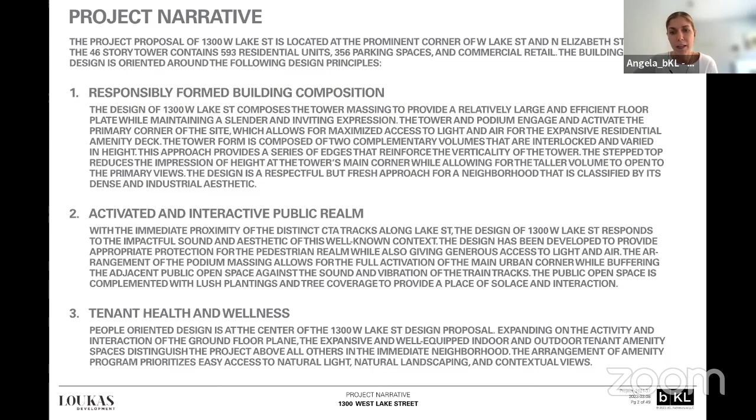So the design we're going to take you through today, and I'll explain further on the design, but we really worked a lot with the city on this design, and we have reflected a lot of the comments that we've received. We really wanted to think about the building composition; activation and interaction with the public realm was a big focus of our design, and then tenant health and wellness and really getting outdoor space and that interaction between indoor and outdoor into the design as well.

As we know, sustainability is a big focus of design today and is something we have to think of from step one. So we have been thinking about sustainability. We are aiming to achieve Green Globes level 2 certification. We're looking to limit the percentage of vision glass and to reduce heat loss and summer solar gain. Bird-friendly design, a lot of bike-friendly focus, electrical vehicle charging stations, and automated building systems for efficient controls.

And then again, with the site design, we are looking to really incorporate a lot of green space and landscaping, as well as shade, and thinking about where sun is on the podium, as well as the pedestrian public realm.

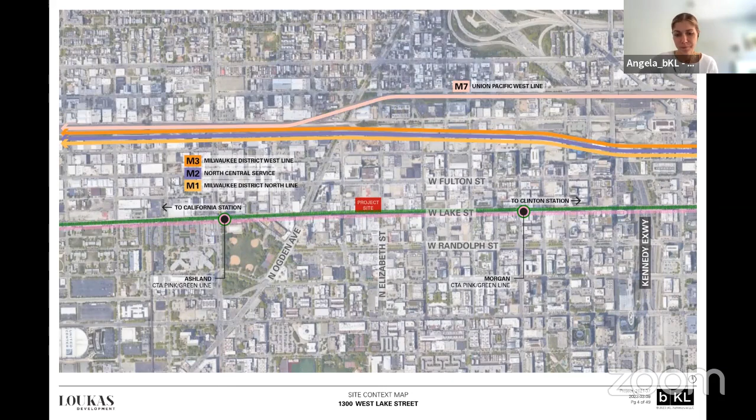So just situating everyone to the site, again, 1300 Lake, it's at the corner of Lake and Elizabeth. You can see here that we are in between two Pink and Green Line stations, the Ashland and the Morgan station, and then as well as just south of our Metra lines, and then west of the highway. Currently zoned M2-3, upzoning to a DX-7, as Josh had indicated. And we do qualify as a TSL.

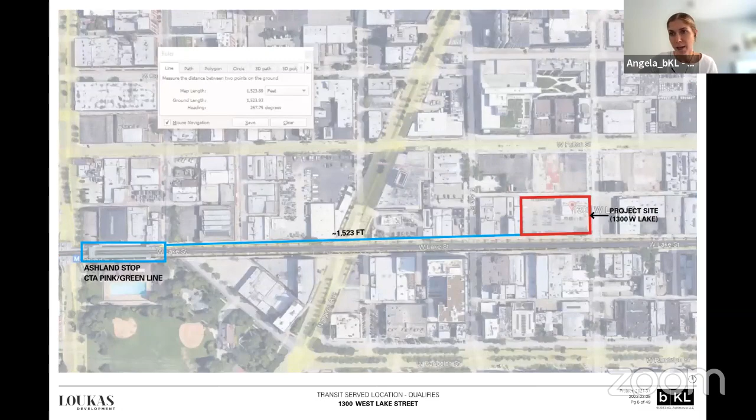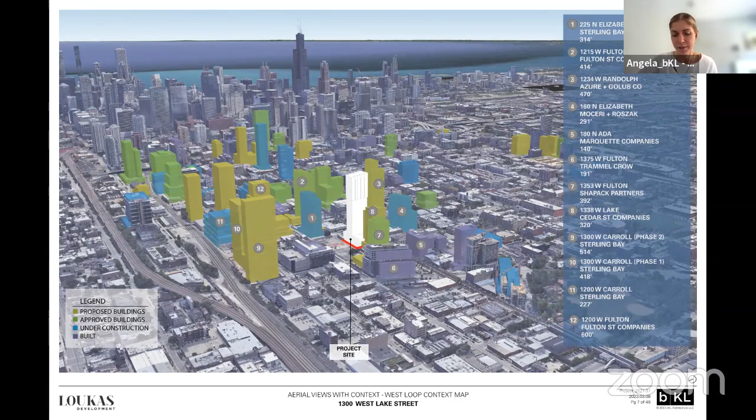Zooming in a little bit to understand the adjacent development, most important, we have to the west, 1338 West Lake. We definitely looked at this in considering design, but we also looked at 225 Elizabeth, as well as 1353 West Fulton, in terms of where they're adding open space to make sure that we're continuing what's happening and responding to what's being proposed in the neighborhood.

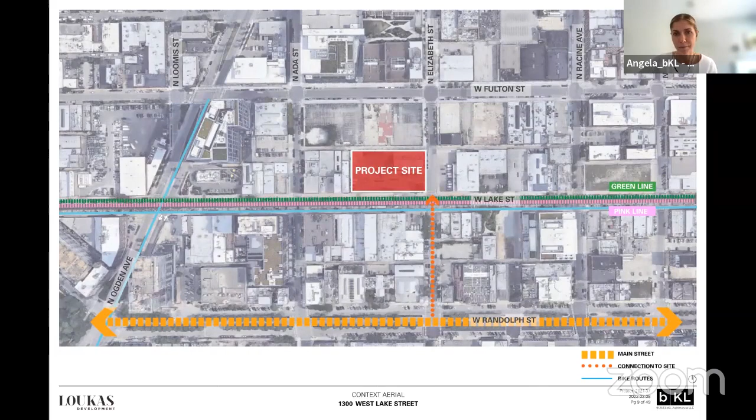Some of the existing site conditions, I think everyone knows Peoria Meats, and that's what's currently there. So that's what the site kind of is known for. There are some current existing curb cuts that I'm going to talk about along Lake and along Elizabeth, as well as our adjacency to the Lake L.

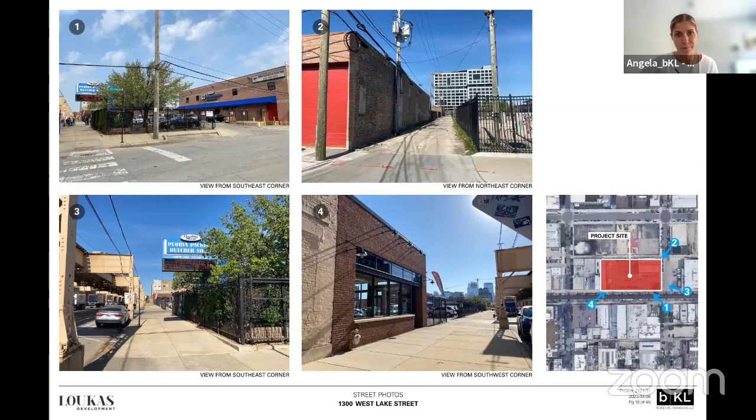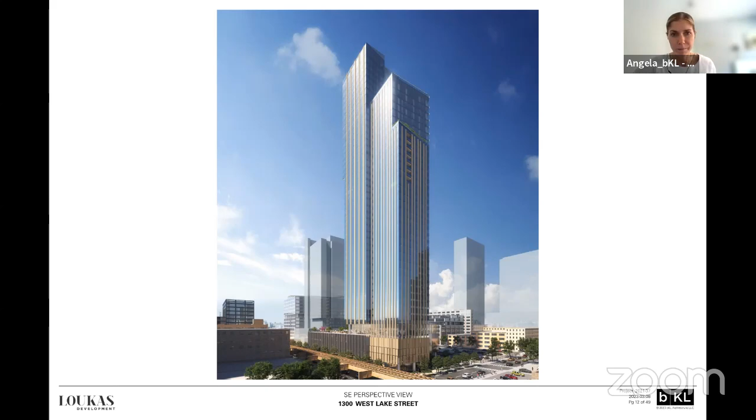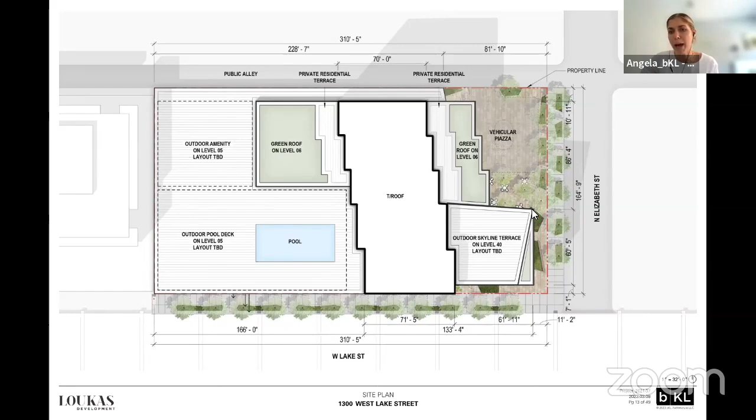Jumping back really quick, I forgot to mention that we did position our tower as far east as possible in response to the Cedar Street proposal to our west. So thinking about that tower separation and making sure that we're responding to some of the other towers that are proposed in the neighborhood. We wanted to hold the corner with our tower, but we did pull back to help open up that public realm, that ground.

So this is just a diagram showing some of that street activation. Again, that thoroughfare from Randolph along Elizabeth, really activating that podium with retail frontage all the way lining Lake as well. Again, not turning our backs to Lake. And then having the active use of our residential lobby off of Elizabeth and really activating this as an urban plaza.

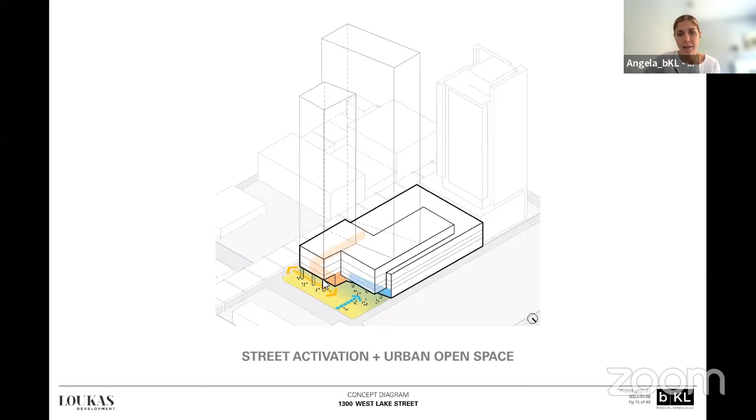The massing and composition that we chose was kind of pushing and pulling at the two volumes. Instead of having the volumes oriented at 90 degrees, which is pretty standard, we actually decided to splay them open a bit. This is also thinking about designing the building from inside out and making sure that those inner corners get more views to the city and aren't looking directly into each other. It also really gives a really interesting juxtaposition against the very stark grid of the West Loop.

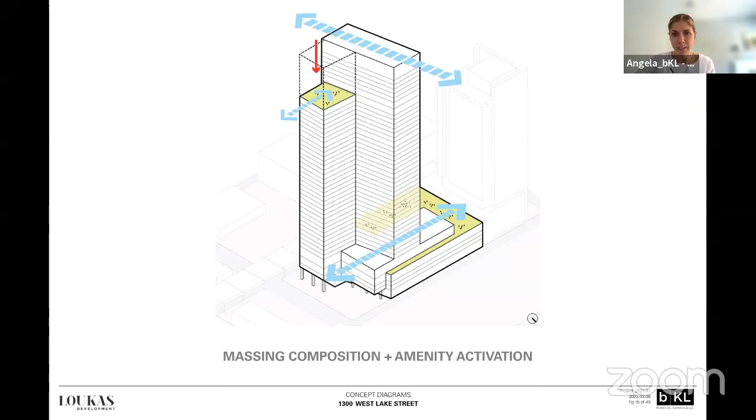We looked at adding some textural expression to the top of the tower. We started with this just at the top of the tower, and in response to some of our sessions with DPD, we have now shown it on both the east and west. And we have also brought this expression now down towards the podium so that it's not only noticeable and unique from far away, but that's also something that the pedestrian public realm will interact with, so that it's tying it together to make a cohesive design.

These are some of the West Loop design guidelines that we responded to. Obviously, we really take those into consideration when we're designing, thinking about the scale of the podium, keeping that low, activating the retail, which I talked about. Number 4 is holding that corner, although we did pull in to really allow space for that public realm to exist. We looked a lot at stepping back the tower at the top and creating a very unique design condition at the top as well.

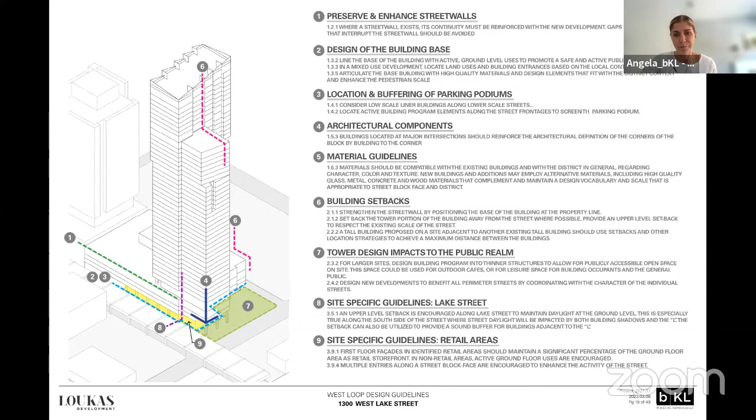I'm now going to hand it over to Matt. He's going to talk about the landscape and public realm, and then I'll take back over and talk about the exterior facade materials when he's finished.

Great. Thanks, Angela. So here we have an overall site plan that includes the streetscape frontage along Lake and Elizabeth, as well as the shared piazza space to the northeast and a dog run located along the alley. Lake Street, of course, has the overhead L tracks that Angela mentioned and creates a lot of noise and shade. And so the design for the site is really intended to mitigate that by providing a dynamic and verdant streetscape experience both along Lake and Elizabeth. And really kind of locating the primary pedestrian area in the northeast corner, kind of separated by the architectural volume to make that a bit more pleasant of an experience to hang out.

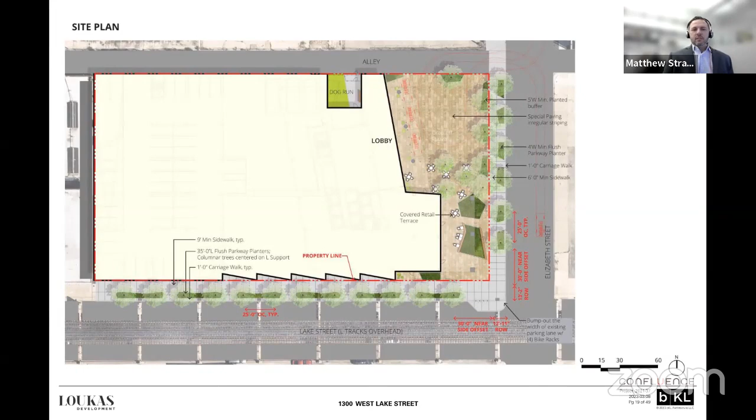Next slide. So zooming in a bit here, you'll see that the landscape begins to pick up on the angular parti of the architecture and really breaks it down to more of a pedestrian scale. A few key zones here: the piazza to the north, what we're calling the oasis in the center, and covered retail seating space to the south.

The streetscape along both Lake and Elizabeth use the typical 25 feet on center tree spacing required by the landscape ordinance, but they use this angular parkway planting motif that ebbs and flows a bit to create a more dynamic experience. It's also what our firm is working on in the Cedar Street proposal next door, which is doing something similar to carry that continuity through.

And then along Elizabeth, a staggered row of tree planters is used to edge the piazza space to create a bit of an alley to walk through instead of just trees to walk by. The piazza space is designed as a shared vehicular and pedestrian space that's flexible enough to accommodate drop-off day to day, but can easily be closed off to host things like farmers markets and small community events on the weekends.

The Oasis is a terrace space that overlooks that piazza, and it features trees that emerge out of the paving with movable planters and seating below. And then the retail seating area is a covered space that combines integral benches and movable tables to create something that really looks sculptural and inviting, whether busy or not. Next slide.

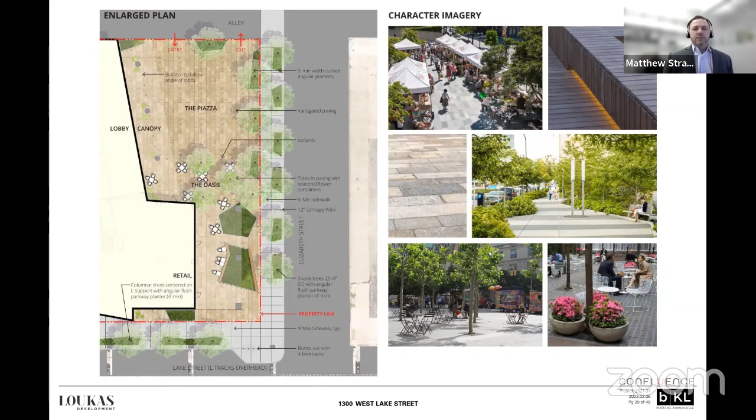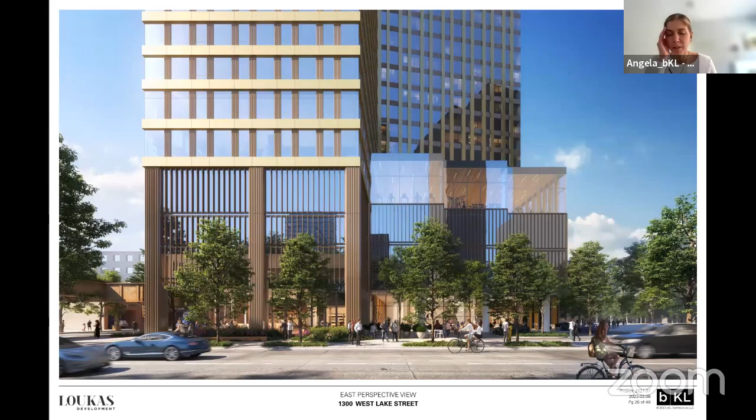So continuing on to the pedestrian realm and looking at that landscape space alongside the architecture, the first of our two options is this first alternate. We looked at bringing some vertical element, bringing the tower down to the ground and using some screening elements over the garage area, as you're seeing here with some spandrel glass, and then highlighting that active amenity space on the third level and the active lobby space on ground, letting it be a quieter expression where the parking is.

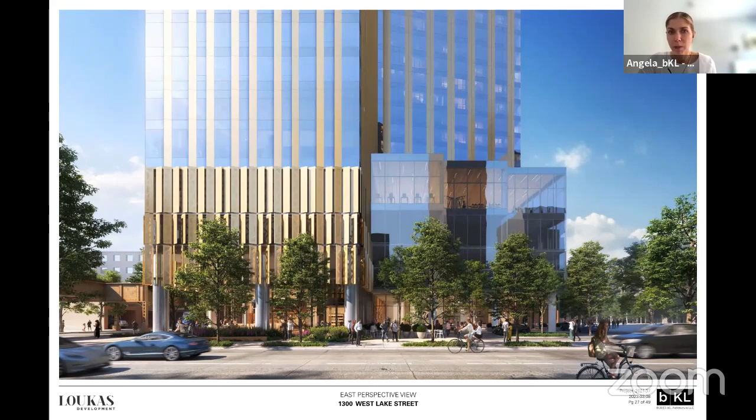In alternate two, we are seeing more of a vertical expression in the tower. We're looking at integrating some paneling in a more artistic design and letting that take on the form of some of the serration that you're seeing in larger moves around the building.

Looking at the massing and seeing where we're applying different materials, in this first alternate we have a horizontal metal panel expression on the east volume, and a more vertical metal panel expression on the west. Where these are either carved back or articulated at the top, it goes to a more glassy expression. We are still using spandrel glass to reduce the amount of vision, but a simpler, cleaner expression where the form starts to take on the articulation within itself. The podium is looking at using metal and brick.

This is in response to our proximity to the L. We did want to look at sound absorptive materials, and we know that a masonry expression is going to help with that and not just reflect all the sound. So we are thinking about that in the podium. We also looked at bird-friendly material in terms of fritted glass or less reflective glass, not only at the podium, because we are sheltered by the L there, but also at our amenity terraces and where there might be some landscaping that's incorporated there as well.

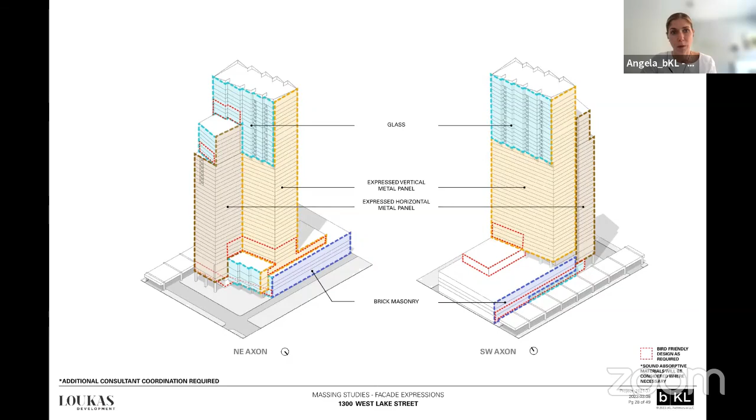In elevation, you can see this alternate one. Again, here you could really see the expression of the horizontal and the vertical. The other thing that we looked at with DPD is the expression at the top of the tower. We are looking at using a screen around the mechanical to really emphasize the serration that is in the design, so that when you're looking up from the tower, that really is emphasized with that screen. Again, you're seeing the quieter glassier expression where the form takes on more movement itself. And then the more textured horizontal and vertical expression in the tower, transitioning to the masonry podium.

Zooming into that podium, you're seeing that there is the masonry piers that are inset with the metal panel on the horizontal. And then in relationship to the L, you can see that we really thought about getting over the L with any of our active uses. So we did build that up in the parking podium, and then to get that amenity activity above the L, and then also activating the ground floor or below, leaving that as a very glassy expression.

Zooming in on each of the expressions, in this alternate one, we're looking at kind of a projecting horizontal or vertical metal panel depending on which volume you're looking at. Either the horizontal is projecting on the east volume or the vertical is projecting on the west volume. We're looking at a textured metal panel in the opposite orientation with vision glass, and then also the sections where the massing takes on more texture to let that be quieter with vision and spandrel glass.

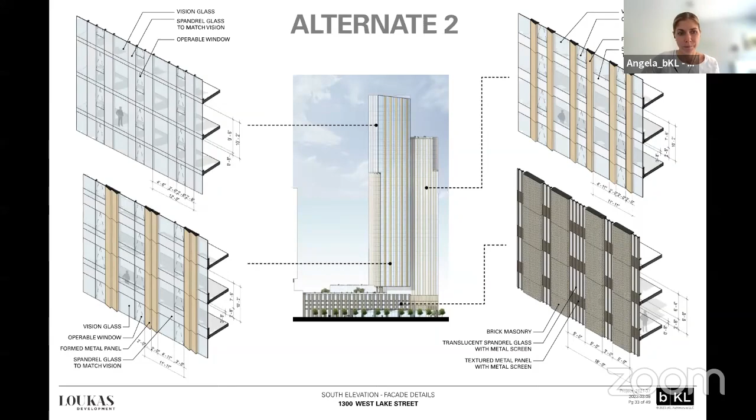Zooming into the alternate 2 podium, what we're looking at here again is a more artistic kind of expressed metal panel that's formed and is looking at that serration that's happening along the retail at the top of the tower. And then it's a quieter expression on the volume that's coming over to introduce and to accent the residential entrance. We are looking at using signage on this middle tier as well to really emphasize where the residential entrance is.

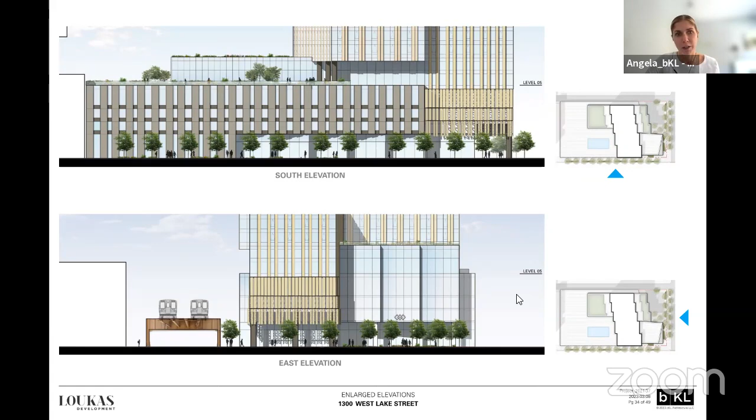This is just some facade precedents. What we wanted to show here is that we're looking at the textured full glazing portions where we're using a combination of spandrel and vision. And we also have our Cirrus Tower as well. And then another, the Avery by OMA, as some of our facade precedents. You're seeing the metal panel precedents at the bottom of the page. And what we're looking at here is a metal panel tone. Not the actual metal, but something that is beckoning back to this kind of softer bronze coloring that you're seeing in the lower images.

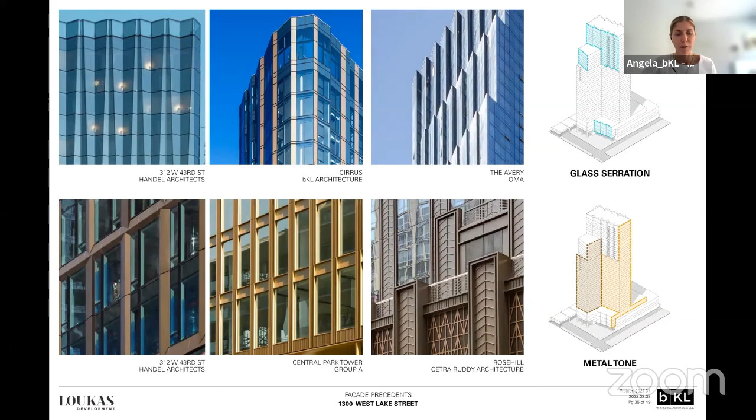We also integrated balconies at the top when we worked with DPD and carving back that tower. So that's kind of happening at what we're calling this uppermost tier.

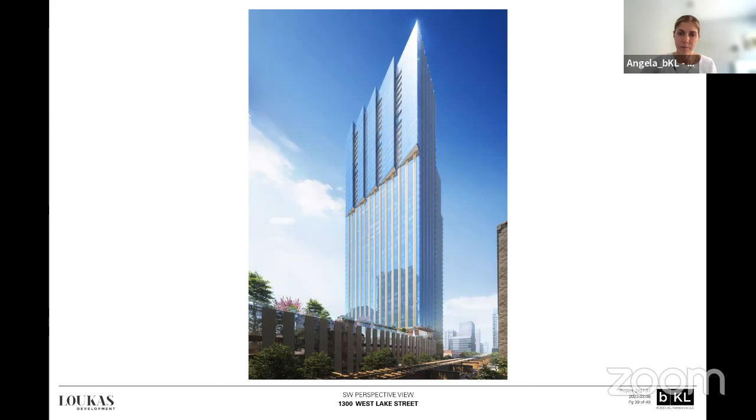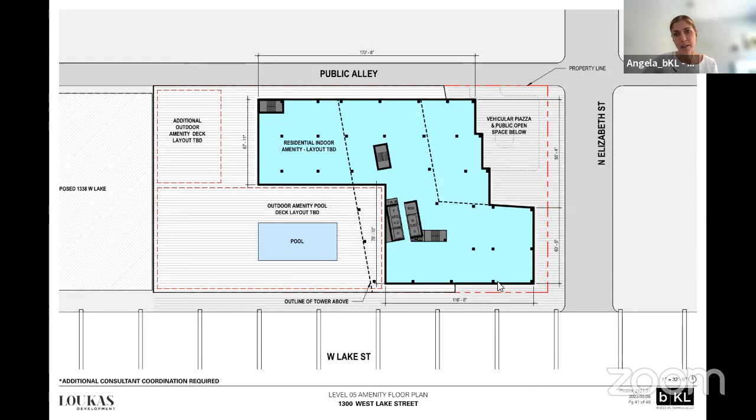And then the upper tier, introducing more residential amenity at the top. And then the uppermost tier, it goes to full residential levels.

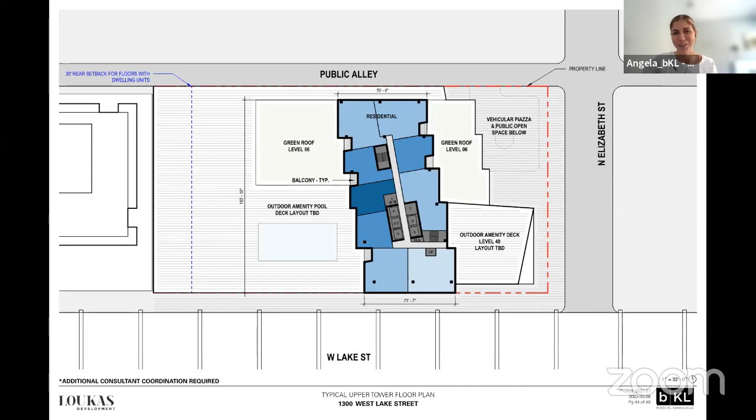And then here's just a program section. So you're seeing kind of everything we talked through, the residential and retail at the podium, parking, upper level amenity, lower level amenity on level 6, and then the upper level also at level 40, where we introduce the tower setback, and then residential happening in between.

And then, yes, lots of sun studies to understand where we should most place our podium, thinking about separation from the tower to the west, as I already spoke about, and kind of just studying those as well.

So now we can move on to questions.

So I'll try to project as much as I can. Before I ask a question, Angela, can you take a moment to talk about proximity to mass transit and what TSL bonuses, if any, were leveraged in the proposal?

Sure, let me just go back. So in terms of TSL bonuses, we did look at, we are making a parking reduction versus what's required in the DX7. We are not taking that full reduction due to the fact that we think that we're serving the community and what's needed with this 593 units in addition to the retail. But mainly we are taking that reduced parking ratio down from what's required in DX7, from 0.7 to about 0.53. In terms of other bonuses related to TSL, Katie, I don't know if we're taking anything else other than just that reduced parking.

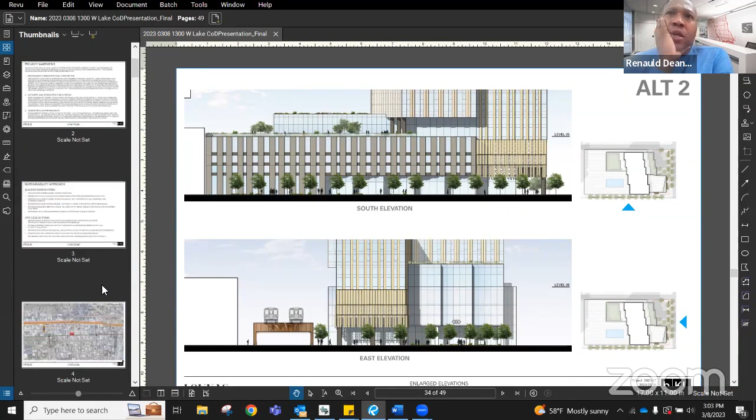Okay, no, thank you. So a couple of thoughts, I don't know if I'll call them questions, more so thoughts. So with respect to the vehicular piazza, I guess in kind of listening to your oratory, you made mention of a desire to obviously pull cars into the site in a safe way.

And it seems to me, Matthew, turning to you, that aspiration may be at odds with this notion of this multi-use combo pedestrian-vehicular piazza that can flex and open and close, just given the amount of vehicular volume that Angela made reference to. I guess I question whether or not in reality you'll achieve the aspirational desire that's been articulated for that space.

I guess the other thing, in looking very briefly at the sun study, the renderings kind of imply a quality of sunlit and daylit space that I wonder whether or not you're going to actually achieve, not just with the shadow that may be cast by your own structure, but just in the volume of development and the verticality of the development in the surrounding and neighboring Fulton Market districts. So if the two of you want to kind of talk about that and respond to that, I appreciate it.

Sure, yeah, I think that's a valid concern, and it's something we've been discussing with DPD as well. I think their concern, as well as ours, was not making a space that really feels like a vehicular drop-off, where it's really intended only for cars with a clearly articulated vehicle route. We wanted it to feel like a space that both pedestrians and vehicles could occupy, even if it could simultaneously be roped off for an event. We really wanted to take away the idea that it looks like a cul-de-sac in the middle of the space, and really feel like a more open pedestrian experience.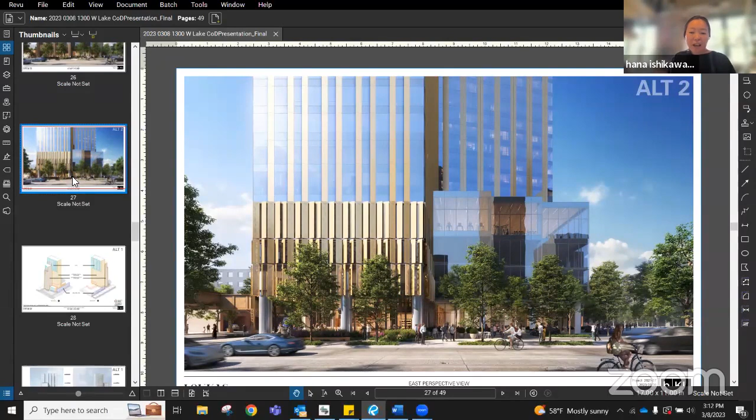I'm also a little worried about the safety of the driveway right next to the sidewalk. If you had a small child walking by themselves, the plants are honestly taller than them at this point, and they're walking into the piazza which has no curb. I agree that having that porosity when there are no cars is interesting and important, but I think there's a little bit of danger in having these openings and treating it like a true plaza, because it really is car centric.

And I think your planters and everything are kind of in the way of that. Also, we have 593 units - I bet half of those units are going to have dogs. So you have 200-plus dogs every day through this site, coming in and out multiple times a day.

I also think you need to protect your planters and think about where the dogs are going when they first leave the building, where they're relieving themselves, and make sure all these planters are protected, because some planters go right down to the ground, and we all know the survivability of those plants is next to nil if that's the case.

Thank you. Yeah, thank you - I think that's all great feedback. I agree, we could probably strengthen more of the portal connection from that corner straight into the piazza space, and think about that a bit further. So we'll certainly study that.

In terms of the porosity, we've been playing a little bit with the limits of the landscape ordinance, because ordinarily as a vehicular space, that piazza would need a 7-foot wide landscape buffer and a fence completely cutting it off from the sidewalk. This was an ongoing discussion with DPD, but their desire was to say, let's maybe go away from that and make it feel a bit more porous and not cut off from the life of the street. So while we can certainly study that further, that's where it was coming from - but we appreciate the comments.

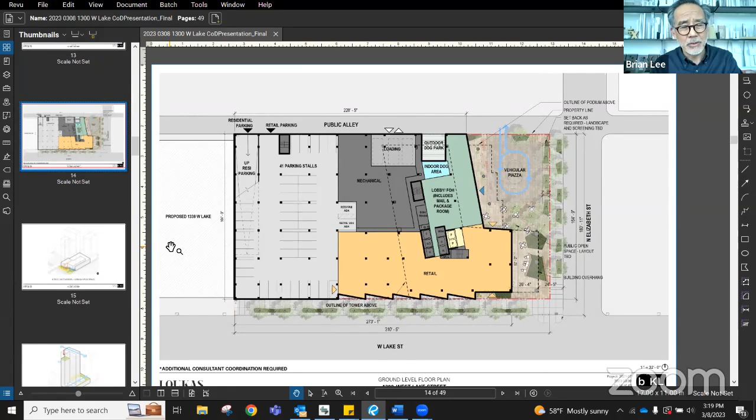open space, art, landscape? I just kind of don't quite understand the story behind the project, because to me, the story behind the project should be expressed in how you develop the building. And I know we can talk about the piazza, and I think actually you could probably, with proper programming, turn it into a court. Let it be a court, and when it's raining and snowing, and other times you could keep people out and develop great programming there.

You could probably stretch retail along the parking garage, and even probably reduce parking. Those are all reasonable things to ask of yourselves. Would people really be driving that many cars? I know you're trying to protect yourself, but it does affect the quality of that human scale environment at the ground.

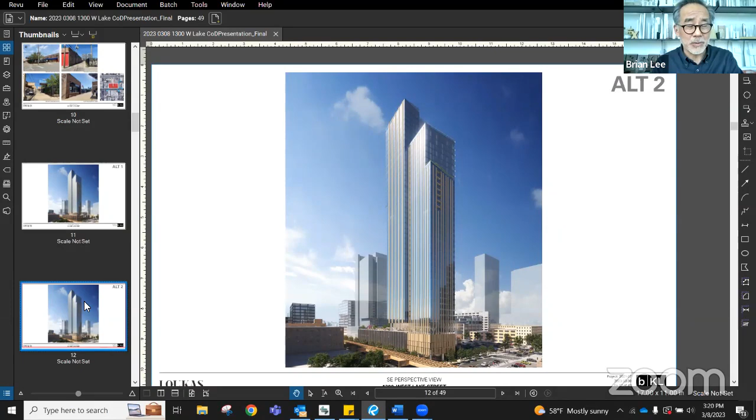I think the biggest question, though, was for the tower, because to me, the tower massing was kind of okay. You broke it down. There's a bend in it. It dropped down in scale so that as you approach it, moving east to west, or see it from downtown or from the western areas, it seems to have some articulation and scale. Although I guess you probably are imagining that the Cedar Street building would block the west, but the west is going to get pretty brutal sunshine, and so you have a broad facade there.

But I guess the bigger question is, besides the massing, is really, what does a tower represent, and its character and personality.

And right now, it just seems that, particularly in Scheme 1, it's just kind of a slightly uninspired collage of lots of different elements. And I think probably 2 seems to be a little bit better, but you should not think of the facade treatment as just being responses to DPD in terms of, well, let's change it from horizontal to vertical, let's push it in, or let's change the material here or the spacing there. It can't be just decoration.

Personally, I think you have to have an idea that, along with the development team, really says, what is this building about? Is it about balconies? Could you show it on some but not on others? And so is there an idea about being able to connect with outdoors and nature? There's obviously a very famous building here in Chicago that had a very standard plan, but an incredible expression of balconies that define the whole building.

Is it about opening up the spaces internal to your plan? Because right now you have an interior corridor that doesn't daylight and it's tucked into the core, so there's no sense of relief. It's pretty ordinary. Do you express the programs of either the units, the modules, or the circulation, or the common spaces? It's a pretty tall building, so do you express the structure in a way that says I am a tall building, it takes a lot of effort to hold me up, and I'm going to be proud of that and really soar?

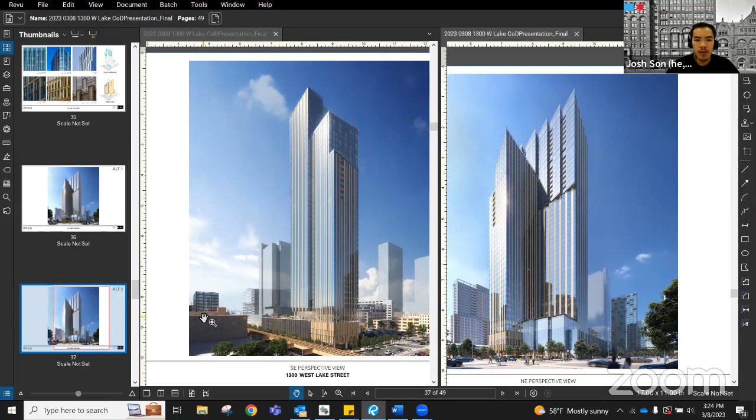All right. I believe that should be it. I know sometimes we have issues with our Zoom hands, but I believe that might be it. So, thank you, Team BKL. I think we will move on to the second item on the agenda. Thank you, everyone. Thank you for your time. Thanks. Bye.

If the next applicant team can go ahead and start sharing your screen, I'll go over the summary. The Ave, located at 3601 to 3625 West Chicago Avenue in the Humboldt Park community area in the 27th Ward, is a proposed mixed-use development on a 30,000 square foot site along West Chicago Avenue between North Central Park Avenue and North Monticello Avenue. I don't know how Chicago pronounces that word. The applicant is proposing to build by right within a B3-2 community shopping district. The project will be a 4-story, 49-foot tall mixed-use building with 49 affordable units, 7,700 square feet of commercial and community space, 32 parking spaces and a community plaza.

To any committee members who are associated with this project, if you have not yet, please recuse yourself at this time and for the duration of the review for this project. To the presenters, please clearly state your name and your relation to the project prior to speaking. You have 15 to 20 minutes to present your proposal. Committee members, please hold your comments and questions until after the presentation.

And then once the presentation is ready, preferably full screen if possible, please state your name prior to speaking. This is Brian Kidd from Gensler, and I'm getting this up to speed here. Thanks, Brian. Hi, my name is Bill Williams with KMW Communities. I think my partner, Julie DeGraff from POAH, is on the line. Got it. I don't see her. Maybe she had a conflict at the last minute. I can see, but it's a PDF. Yeah. You're not able to do full screen. I think that's okay. Brian, if you want, I can do it from my side, but you will have to prompt me when you would like me to move on. Yeah. My apologies, we're having some technical difficulties.

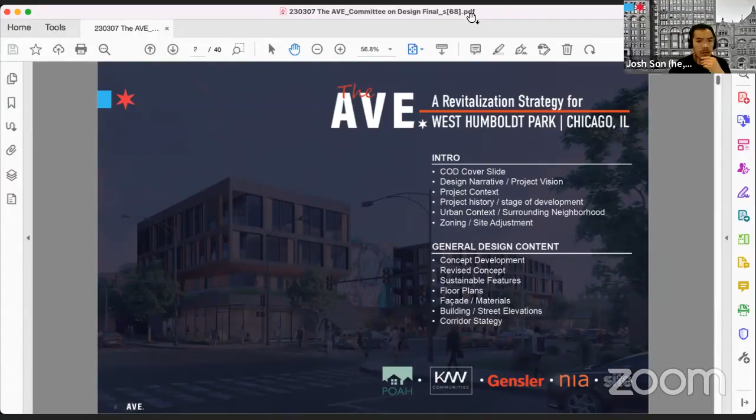Brian, you can click on the X on the page thumbnails, up top. Right in front of page thumbnails, there's an X. Okay. Yeah, right. Got it. Sorry, Brian, Control L should also put you into full screen mode if you'd like to try that too. Or if you're on a Mac, I think Command L. Is that full screen now? No. It is not, but I think we can go ahead. Let me just go here to my desktop and share that. Okay. Perfect. Great. Awesome. Sorry about that.

Thanks, Brian. I think I will lead off this presentation. As Josh mentioned, this project is located at 3601 West Chicago Avenue, commonly known as the Ave. Here's our agenda for the day. Before we get into it, I'd like to introduce our team. We have POAH as part of the development team, KMW, and the design team is Gensler, Nia, and Site. And we have DLA Piper as our land use attorney. I don't know if anyone on the team wants to make a formal introduction. If not, we can just move on.

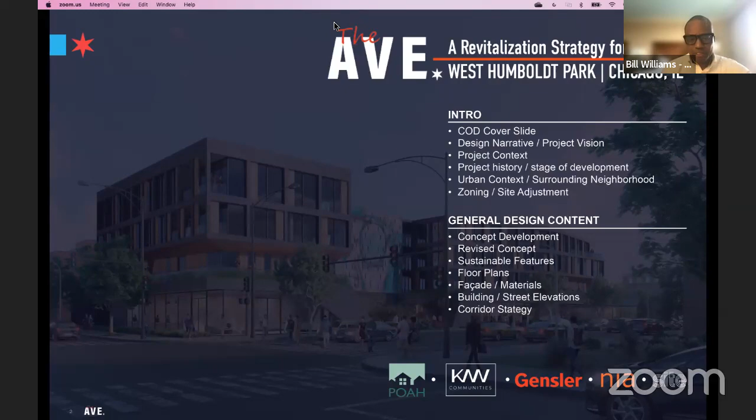You want to move to the next slide, Brian? Oh, technical difficulties. Julie, you were saying something? We're good, Bill, with your introduction. Thank you. I'm sorry. I'm trying to get to the next slide and it's not working here. Brian, let me take over. All right, you take over. Allow me to be the sharer, and then Brian, during the presentation, just prompt me to move to the next slide. Got it. My Mac is not working well with the Zoom. Okay, I think this is the next page. Here we go.

So I was mentioning that POAH and KMW are the primary developers on this project along with the community. And this project is one of the Invest South/West sites. The goal of this site was to bring investment, bring attention, and activate this side of West Humboldt Park, and also provide elevated affordable housing. The project consists of 70,000 square feet, and within that project, we'll have 49 affordable apartments and 7,800 square feet of retail.

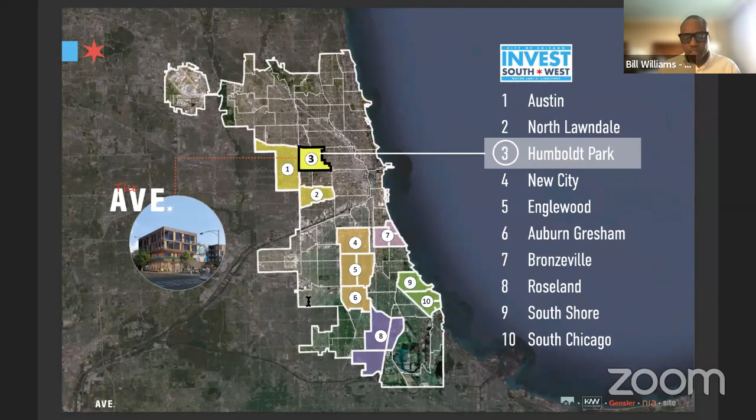And the project will be anchored by a longstanding neighborhood institution, Neighborhood Housing Services, that provides housing services and preservation for the neighborhood. And we're excited to get this project going because it's much needed in West Humboldt Park and will hopefully spur other developments and complement other efforts that we're doing in the neighborhood. So I'll turn it over to Brian now and the design team, and just prompt me when you go to the next slide.

Thanks, Bill. My name is Brian Kidd. I'm with Gensler in Chicago. The project is located in Humboldt Park. Go to the next slide. Located along West Chicago Avenue, 3600 West Chicago, right on the street there between Central Park Avenue and Monticello Avenue. A couple of the local developments or buildings: there's the Kelly Hall YMCA to the west, and the Rowe-Clark Math and Science Academy also to the west.

The site is currently zoned B3-2. We're looking at upzoning it to B3-3, mostly because of the number of units. We are looking at trying to do this project as not a PD and making it as-of-right zoning with an upzone to B3-3 just to allow the number of units. A B3-2 would allow us to do 48 units, but we're looking at doing 49 units, and that would require this slight upzone to accomplish that.

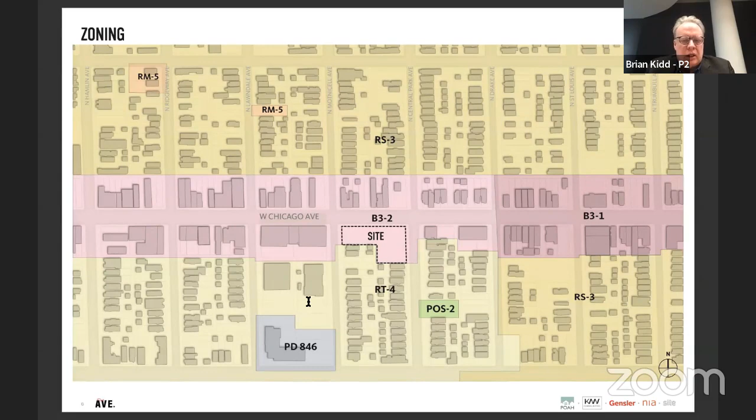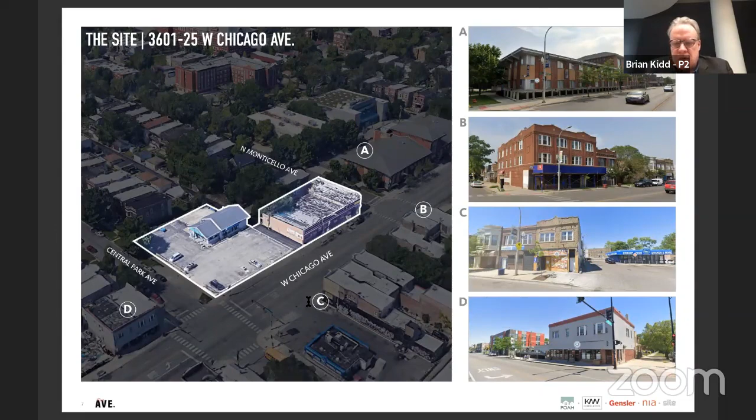The site, as Bill had mentioned before, is currently the NHS office, which is formerly, I believe, a gas station that was on the site. That is along Central Park Avenue. And then there is a city-owned building directly to the west. The little diagram there that is the school. B is some existing buildings that front along Chicago Avenue. It's a combination of 2- and 3-story buildings along that, and then directly across Central Park again are some smaller retail with residential up above on the second floor.

The existing property, the 3613 building is owned by the city, and then the 3601 is the NHS office. We are looking at combining both of the sites, vacating the alley that is between the two sites, and dedicating a new alley that exits towards Central Park. This is sort of a mixture of alleys that come all the way out to Chicago Avenue versus not having any curb cuts along Chicago Avenue. So we are wanting to basically combine the two sites, create no curb cuts along Chicago Avenue, and extend the building to front the entire block on Chicago Avenue.

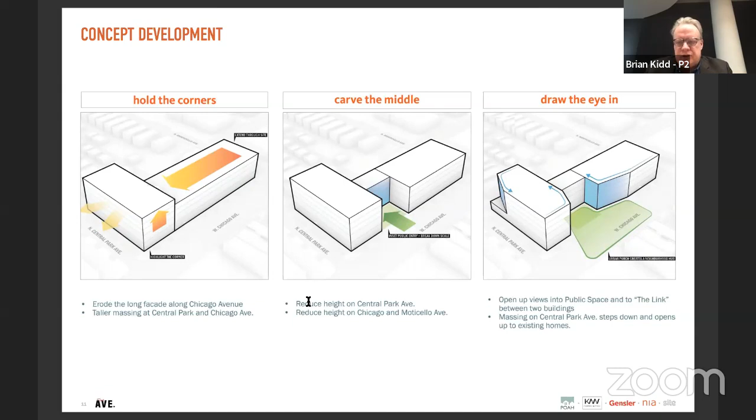Some of the design intent was to hold the corners. Corners are very important for this site. And then carve out this space in the middle to reduce the height along Central Park Avenue, reduce the height on Chicago, and provide some relief on Chicago Avenue. And then we started to carve away at the building to open up the building in the center to create this plaza and this welcoming area in the center of the building, kind of wrapping our arms around this plaza in the middle of the block.

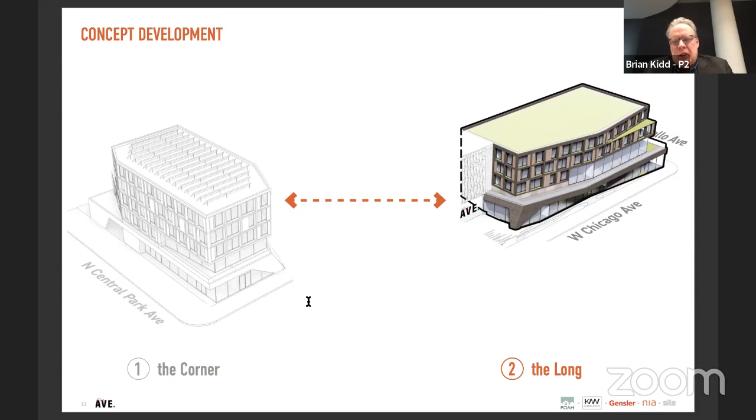The corner along Central Park Avenue and Chicago Avenue was the tallest portion of the project. We wanted to create a stronger presence on one corner of the building. Next. And then along the west side of the block, having a longer frontage along Chicago Avenue that also kind of steps down to Monticello along the west side. And then in the middle, what is being described as the stoop. It's sort of the public area. It is one of the main features of the project, a gathering place for the development.

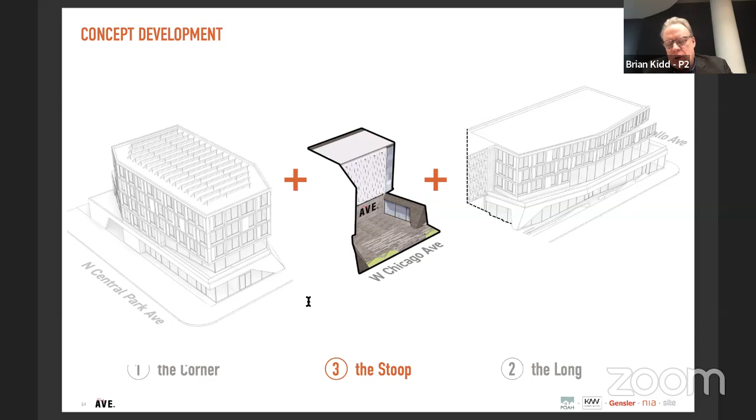Granted, we have not developed this area as fully as we want to. We are still working on some program elements, and we're challenging our landscape architect and site design to come up with a way in which this plaza can be used in multiple ways. It's a public gathering spot. It is a place that we can change the artwork. This screen wall, which is one of the features here, wants to be able to be changed.

We're thinking about some sort of screen wall with a paint coating that would allow us to project items on this that could be changed, and they could be used to celebrate different times of the year, different artists in the neighborhood, different things that make Humboldt Park unique and special, while serving as a backdrop to some of the events that could occur here. And we're thinking farmers markets, sidewalk sales, music, entertainment, other things that might happen in this space, and that's what we want the landscaping to be able to incorporate and reflect. So we're going to make this a very hardworking space that can be transformed to accommodate different functions and features.

And we've called this the stoop. It's sort of that welcoming gathering place that you can hang out. And then that sort of led to this idea that we create the porch at the second floor.

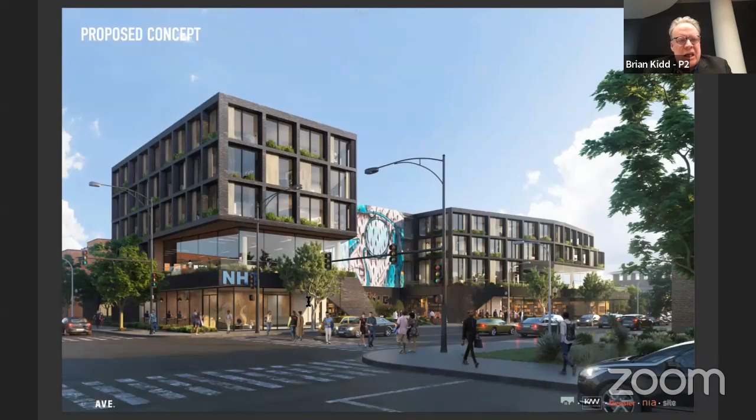The original concept had a 5-story building on the corner of Central Park and Chicago, and then the rest of the building was a 4-story building. We've changed that a little bit based on some of the revised program, and also an attempt to try and utilize maybe a less expensive construction type, which would be limited to 4 stories. So we have altered some of the space. Next slide. And this is the revised concept, and the next slide sort of illustrates how we got there.

So we removed 1 floor of the 5-story building, so it's all 4 stories, but we still want to accentuate the height of that side of the building. So we're talking about having a taller floor-to-floor height for that 4th floor on the corner there, as well as maybe an exaggerated parapet.

We moved the NHS space down towards the west, and incorporated residential units in that second floor space. And we still like the idea that we are creating this sort of porch area that can be activated for the residents that live on that floor, green space, plantings and activity that occurs up on that level.

So just as an overview of the development program, we have 49 affordable units. Every unit in the building is affordable. We actually originally started with 44 units, and we were able to increase the number of units because we took over that second floor space and reduced the overall square footage in the building, and we're able to make this all work within the 4-story building. We have about 2,900 square feet for the NHS office, 4,800 of commercial space, and we have 32 parking spaces that are accessed off of Central Park Avenue.

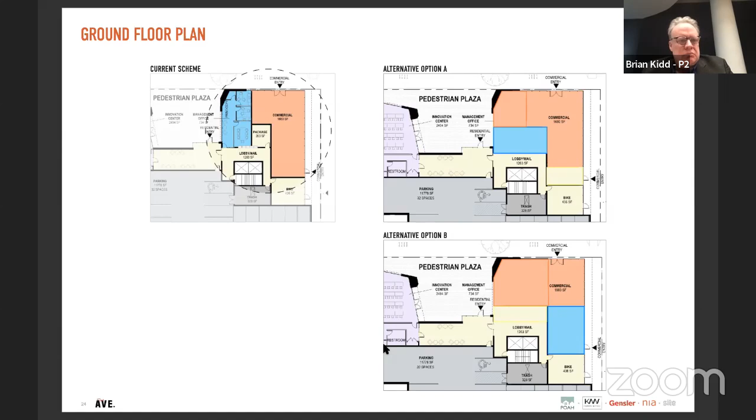I just wanted to interrupt. We have about 5 minutes left on this. Okay.

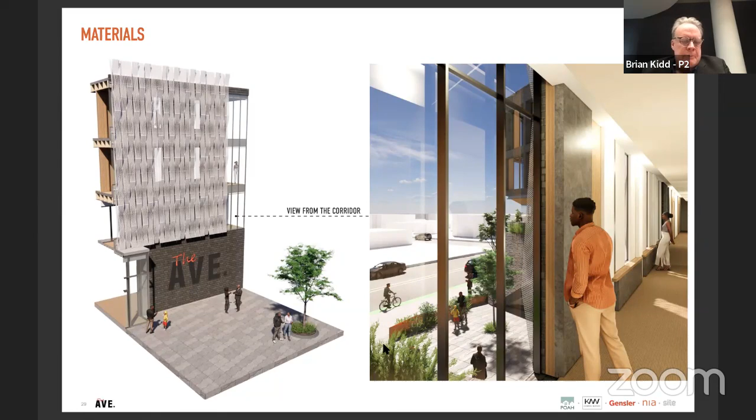This illustrates the screen wall that would have these projections on it. We are thinking about having some windows that would allow residents, as they're going down the hallway, to have visual access out into the space, creating some interest and also keeping that plaza area safe at all times of day and night. And this is a little illustration of what happens on the inside, allowing these views out.

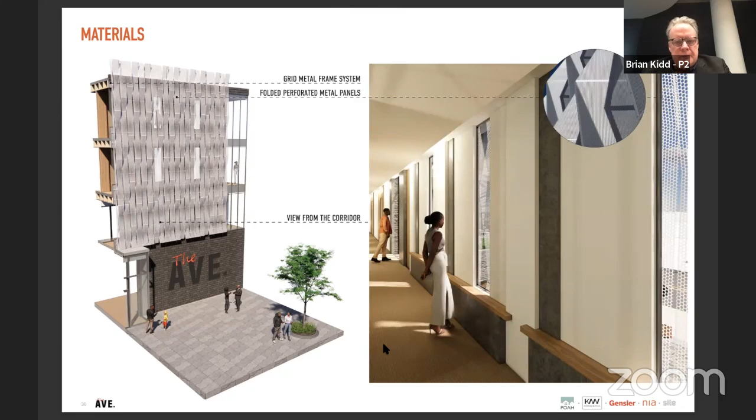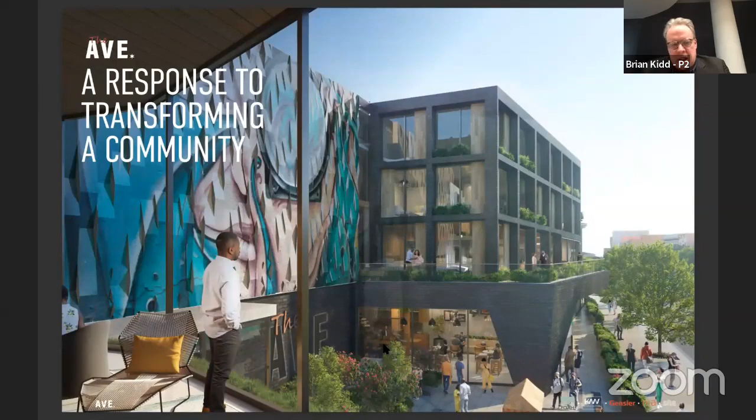And some views looking from the porch out to this plaza area. And then celebrating the stoop.

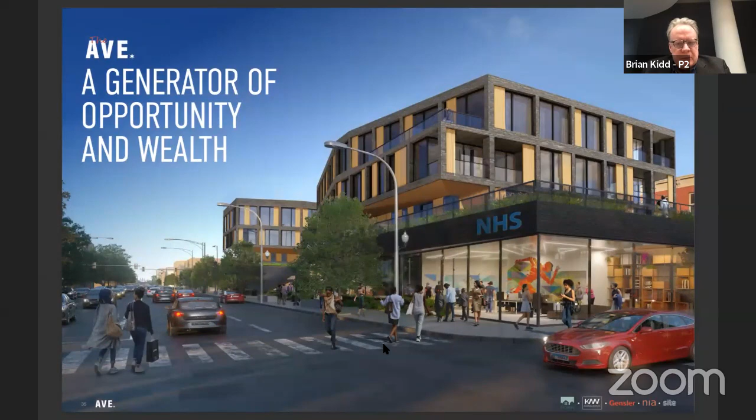And then this is the corner at Monticello with the NHS office, showing the setbacks.

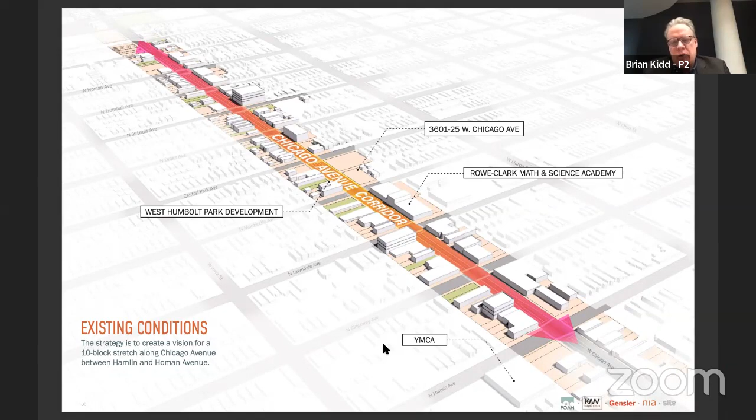This is part of a bigger effort to look at what happens along Chicago Avenue, and this is part of the developments that could be occurring along Chicago Avenue, hopefully spurring some additional development here. This would be the first phase of that development, with future phases coming a little further to the west and to the east.

And that is the corner. Wanted to address just one last thing, which was some of these battered walls, angled walls occurring down at the ground floor. We are still looking and playing around with that, maybe thinking about narrowing these things up so that there's a little more visibility out towards the plaza area. There has been some discussion about maybe incorporating some seating at the bottom of this.

When we had commercial space up on the second floor, we were not as concerned about security, but we do want to make sure that nobody can essentially run up these ramps to get up to the second floor. I know that I would have been tempted as a child to do that.

And I think that's the final slide.

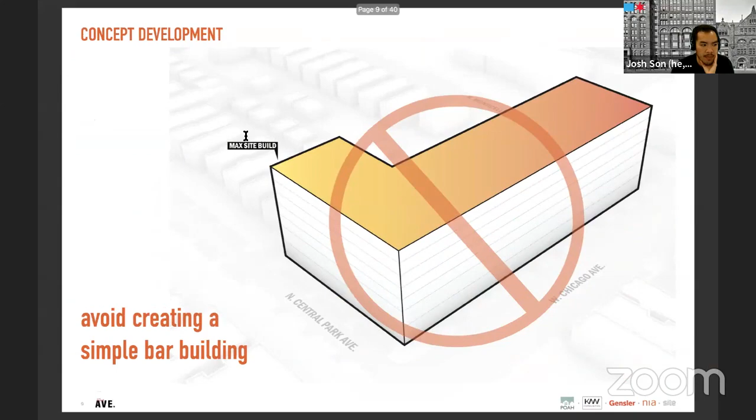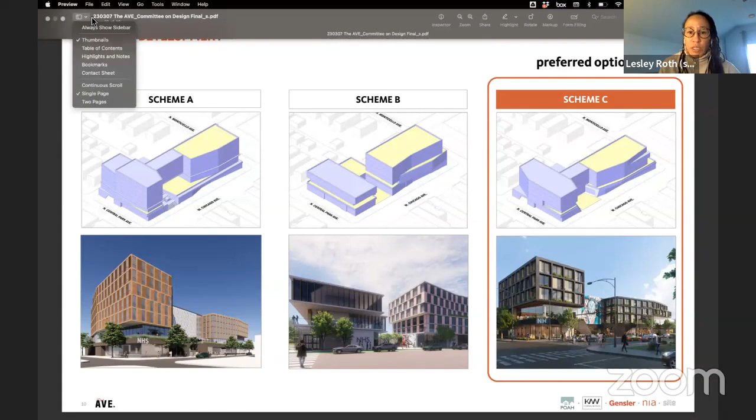This is a really exciting project. Thank you so much for your presentation. I'm thrilled with all the improvements that are going to take place in the coming years along Chicago Avenue, and I'm really happy with the way that this project is shaping up. I really appreciate the thoughtful approach you've taken with the massing of the building, paying attention to holding the corner and keeping the street wall intact, while playing with a geometry that's very creative and also responsive to the spaces you're planning for the interior of the building. I think the alley access that you've created with the new alley is also important for circulation to the back of the building and parking.

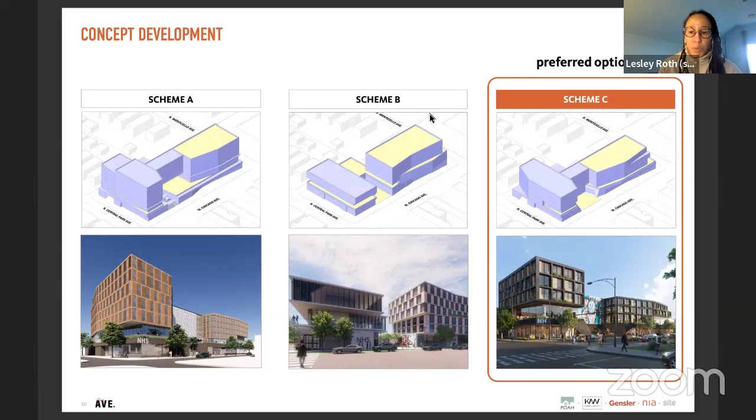So I think that's a nice gesture. The only comments I really have are — Brian, you kind of talked about this — the angled walls that potentially need refinement. Part of that is articulation of the residential entry and entry into the innovation space located off of Chicago Avenue. Just a cautionary tale about the Innovation Center and how that's going to be programmed and managed. We would prefer that the space be activated as often as possible.

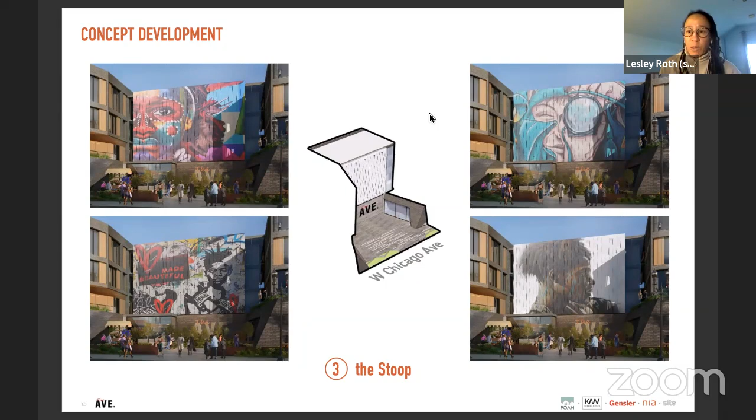What we're learning is for community rooms and innovation centers, especially on the front of the building, the glass part looks cool, but the amount of time they're actually programmed, you're looking in on an empty room. So hopefully having some conversations with NHS about how the room is going to be programmed can alleviate that.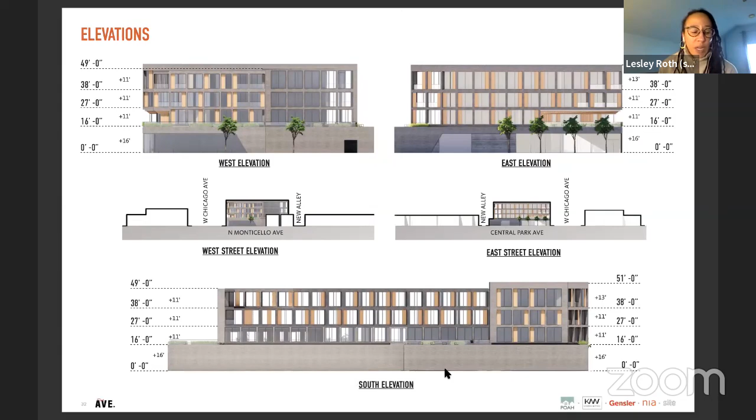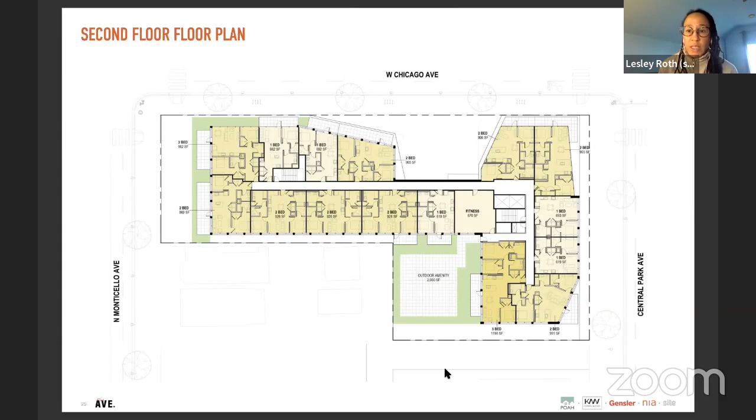The other comment I had is about the second floor space. I know, Brian, in your presentation you mentioned that NHS was first located on one corner of the building and moved over to the other corner. I would just look at what that means for the elevation. When the second floor space on Chicago and Central Park, where NHS is now residential units, it still looks like office fenestration. And similarly on Monticello and Chicago Ave, that still looks like office — it needs to be coordinated with the fenestration, and the building architecture needs to be coordinated with the new program in terms of floor to floor height and how you have these really nice large openings for the residential. It still sort of looks like office on the second floor.

And then I know you mentioned site was part of your team, so the plaza I think could be really interesting, and I'm sure going through the design process that site is going to take a close eye to that. But I really like the movable art. And I think the use of the roof plane to generate energy, and even though it's non-occupiable green roof space, I think the sustainable strategies incorporated into this building are a model for a lot of the other buildings we look at that have neglected to add those in. So thank you for your efforts there.

Nice project. Thank you.

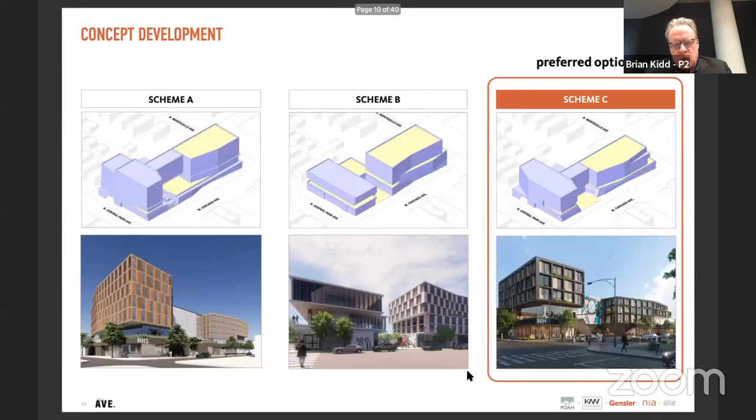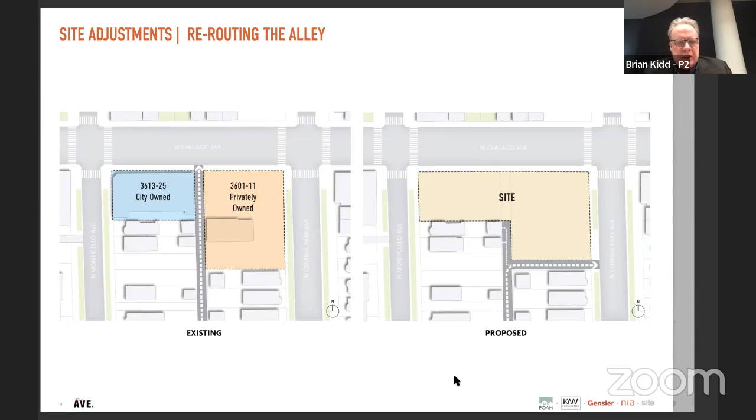We did look at that a little bit. There were some concerns about overloading that alley, so we thought access might be better if we didn't use the alley. We're having 32 spaces in the building, some of which will be occupied by NHS as well as some of the residents. So it's trying to be considerate to the neighborhood uses — we were a little concerned about overloading this alley, which is mostly used by residents in the neighborhood, whether single family homes or two-flats. We could do that if needed, but we preferred to have the entrance coming in off of Central Park, further away from the intersection, basically right adjacent to the alley. It's just noticeable that there's a curb cut right next to the alley.

So the project, I think, is a very good example of a well-planned, pioneer mixed-use development. It doesn't overwhelm the scale of the neighborhood, and adding that density and the programs, I think, are really great. In fact, I kind of thought the added floor was still okay too, as long as you're able to get as many units as you want. Did you guys consider having it taller to get more units, or was 49 the target, not more?

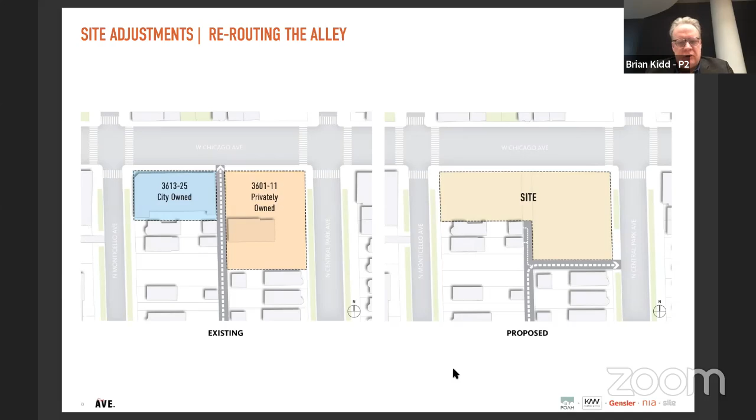Actually, 44 was the target, and once we refined the program and pushed the building slightly further south, we were able to accomplish everything we wanted in 4 stories. It's also affordable housing, so we're trying to be careful with cost, and adding a 5th floor would have put us into a different construction type, which would have been more expensive.

I think it's nicely planned. Are there balconies or sliding doors or any of those things? I noticed in some of the earlier schemes you had deeper recesses, so I'd encourage you not to flatten things out.

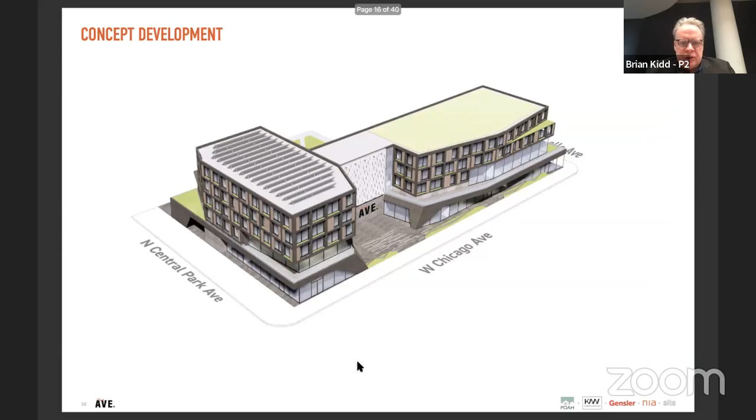We have balconies that show up in the plans, mostly on the corner units and also at the second floor. They're a little hard to see, but there are balconies incorporated throughout the project. These are all small quibbles, so congratulations, I think it's a very positive proposal. Thank you.

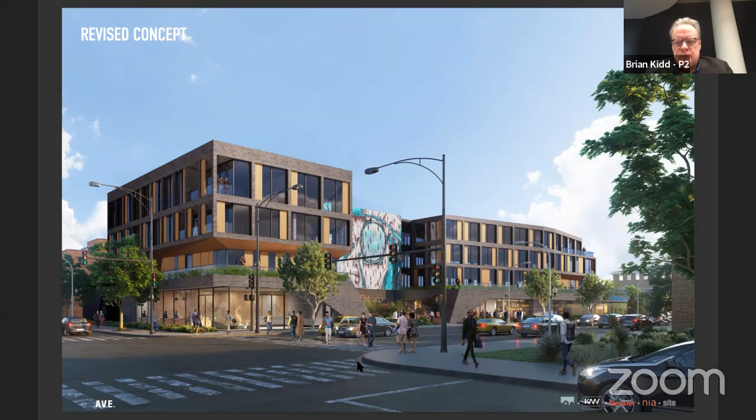Arnold, I see your hand next. Thanks, Josh, and Brian and team again, echoing everyone else's sentiments - congratulations on a well thought out project. Really only two questions, maybe comments, take them however you wish.

On the parking level, piggybacking on Brian's point, I noticed the location of the service dock being positioned off of the alley, and wondered if that's a little too disconnected. Operationally, residents and tenants moving in and out would need to traverse the parking aisle. Is there an opportunity to create more connectedness between the service side, the service elevators, or even the commercial tenants on the ground floor?

We did consider putting it closer to the elevators, but that would create more curb cuts along Central Park Avenue and eliminate parking spaces. It's a very tiny footprint, so we tried to be careful, utilizing what would typically be an unused corner in the parking garage as the loading area. Traversing through the parking area to get to the elevators is a bit of a compromise, but it avoided creating more of an issue along Central Park Avenue.

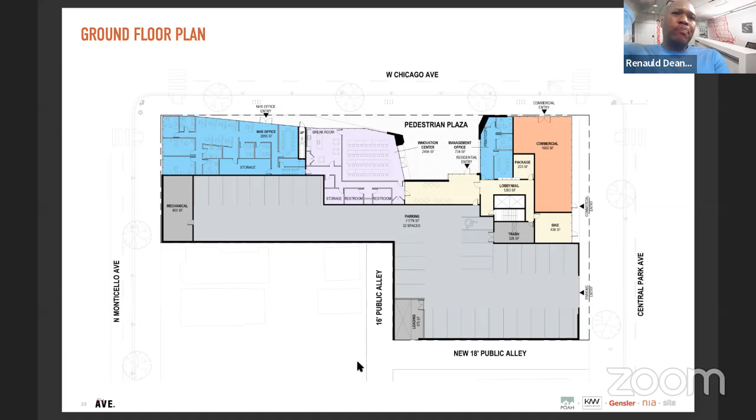All right, duly noted. And then the only other question - cycling back to the Chicago Avenue elevation, the second floor of the taller mass, some of the balconies that are there - is that just a remnant of the earlier scheme, or is the intent to preserve that look now that the entire floor is all residential?

It's a great question, and we thought that through ourselves - should this remain, and does it make sense to have as much balcony at that level as we're currently showing? We liked the form of the building that had this separation or reveal between the ground floor and the upper levels of residential. I think it was a fair comment that we need to make that look less like a commercial space and more of a residential space.

That might mean changing the fenestration so that it doesn't look as commercial as it is. But we like the idea that we have this outdoor space, this second floor porch area, that creates a more active and interesting space, and we can incorporate some landscaping and outdoor activities for residents at that level. Thanks for that.

Again, overall, congrats on a very well thought out and well planned development. Thank you.